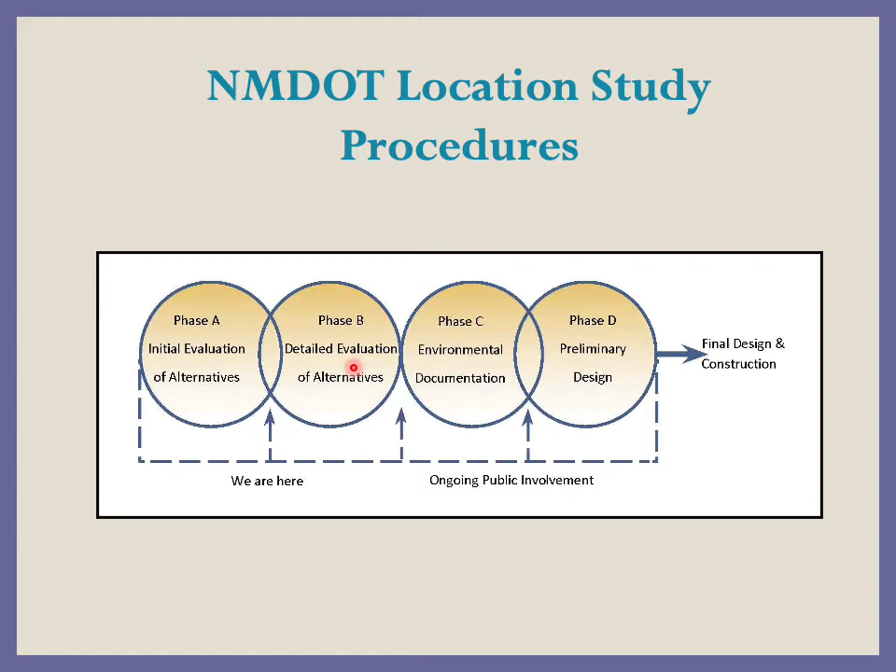The study process will follow the NMDOT location study procedures, which utilizes a phased approach to project development. We are currently in the study phase of the project. Tonight's presentation will primarily focus on analysis completed as part of the initial evaluation of alternatives and describe how that earlier work will be incorporated into the current Phase B study.

Transportation planning efforts for the St. Francis Drive corridor began more than 10 years ago with a 6-mile corridor study that began at Rabbit Road, south of Interstate 25, and ended at the New Mexico 599 interchange. The 2010 study identified improvements to the St. Francis-St. Michael's interchange as the #1 priority project for the corridor.

The NMDOT completed a Phase A technical study for the interchange in 2018. The technical study included an analysis of needed improvements, evaluated a range of potential improvement alternatives, and recommended which of the initial alternatives would be advanced for further study. The Phase B study will provide additional evaluation and analysis of the remaining alternatives and provide opportunities for public participation in the study process prior to selecting a preferred alternative for the project.

The project study area is shown in the figure to the right. Along St. Francis Drive, it begins at the intersection with Siringo Road on the south and ends at the West San Mateo Road intersection on the north. Along St. Michael's Drive, it begins at the South Pacheco Street intersection on the west and ends at the intersection with East Galisteo Street on the east. The project study area includes 5 signalized intersections and 1 non-signalized intersection.

St. Francis Drive, also known as US 84, is an important regional facility. It provides access from Interstate 25 on the south to a number of communities north of Santa Fe located within the north-central part of the state. Both St. Francis Drive and St. Michael's Drive are important arterial roadways within the Santa Fe local transportation network.

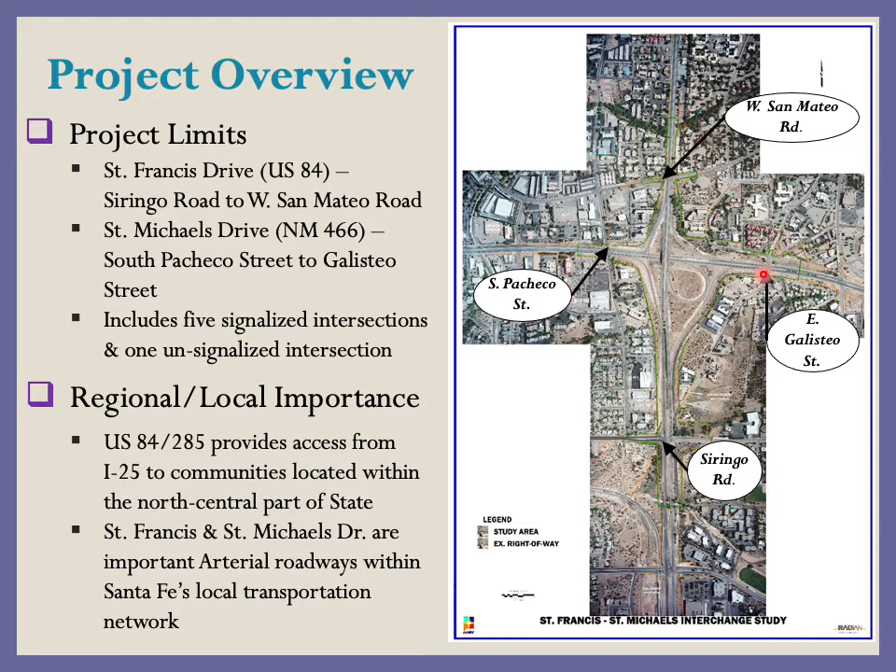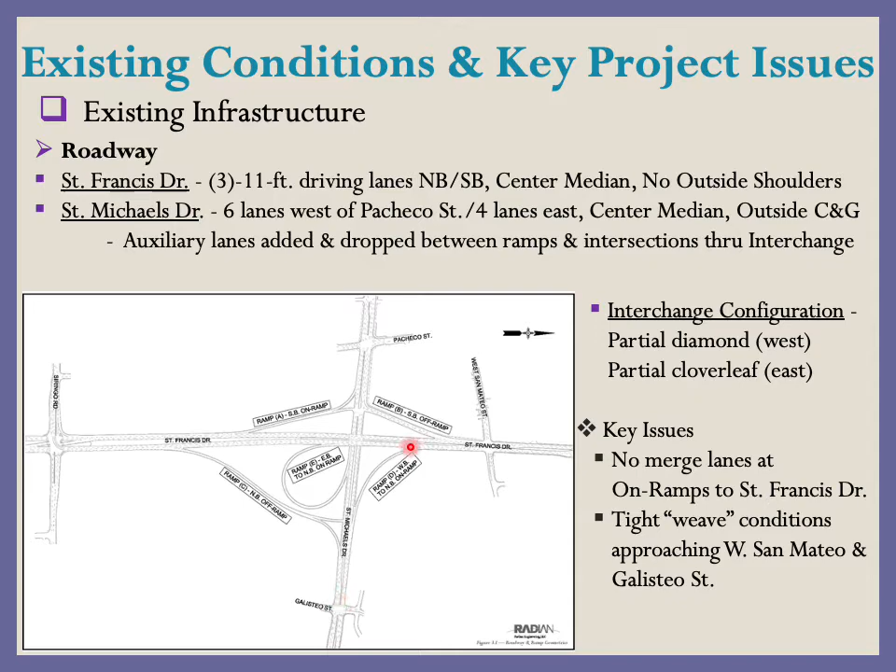Roadway features within the study area are as follows. Along St. Francis Drive, there are 3 11-foot lanes in each direction with no outside shoulders and a center median area. Along St. Michael's Drive, there currently exist 6 lanes west of Pacheco Street and 4 lanes east of Galisteo Street. Within the core of the interchange, auxiliary lanes are added and dropped between ramps and intersections. The interchange is currently configured as a partial diamond on the west and as a partial cloverleaf configuration on the east. Key issues include a lack of merge lanes at the 3 on-ramp locations to St. Francis Drive and tight weave conditions approaching the East Galisteo Street intersection and the West San Mateo Road intersection.

The existing interchange bridge carries St. Francis Drive over St. Michael's Drive. The bridge is 106 foot long by 92 foot wide with a 14-foot center median. The structure is comprised of a reinforced concrete box girder superstructure with full-height reinforced concrete abutments.

There are a number of key issues to be considered under the current study. The existing bridge is now approaching 50 years in age. The existing bridge deck is too narrow to accommodate a merge lane for the northbound on-ramp. A recent load rating analysis found the structure to be 43% under capacity. The bridge is classified as structurally deficient and functionally obsolete, and the structure type is not considered a good candidate for rehabilitation.

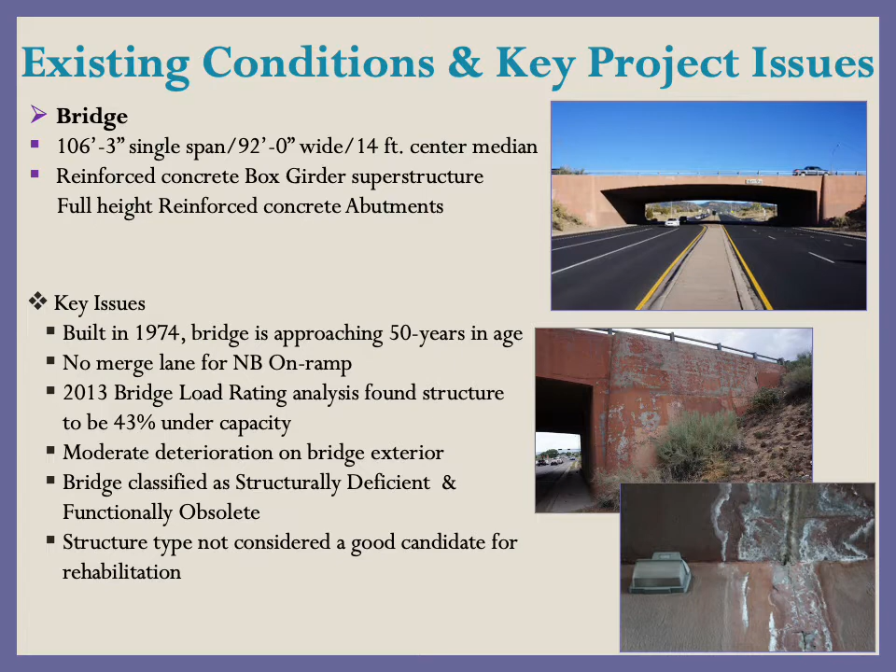Multimodal facilities. There are currently limited pedestrian and bicycle facilities within the study area. Pedestrian signals and crosswalks are found at some, but not all of the intersections. There is existing sidewalk along St. Francis Drive north of the project area and along St. Michael's Drive west of South Pacheco Street and east of Galisteo Street.

There's a multi-use trail that runs along the east side of St. Francis Drive from Siringo Road to Galisteo Street and connects south to the rail trail. On-street bicycle lanes can be found on St. Michael's Drive east of Galisteo Street and at the cross streets of Siringo Road and West San Mateo Road.

There are 4 transit operators currently operating within the study area. They include Santa Fe Trails bus service, the NMDOT shuttle service, the North Central Regional Transit District bus service, and the Rail Runner commuter train, which utilizes the Zia station south of the project area.

Key issues to be considered under the study include lack of pedestrian access along St. Francis and connectivity to the surrounding neighborhoods, missing sidewalks and unmarked pedestrian crossings along St. Michael's Drive, long crossing distances and lack of pedestrian refuge at intersections, and missing or inadequate bicycle facilities on St. Michael's Drive and at intersection cross streets.

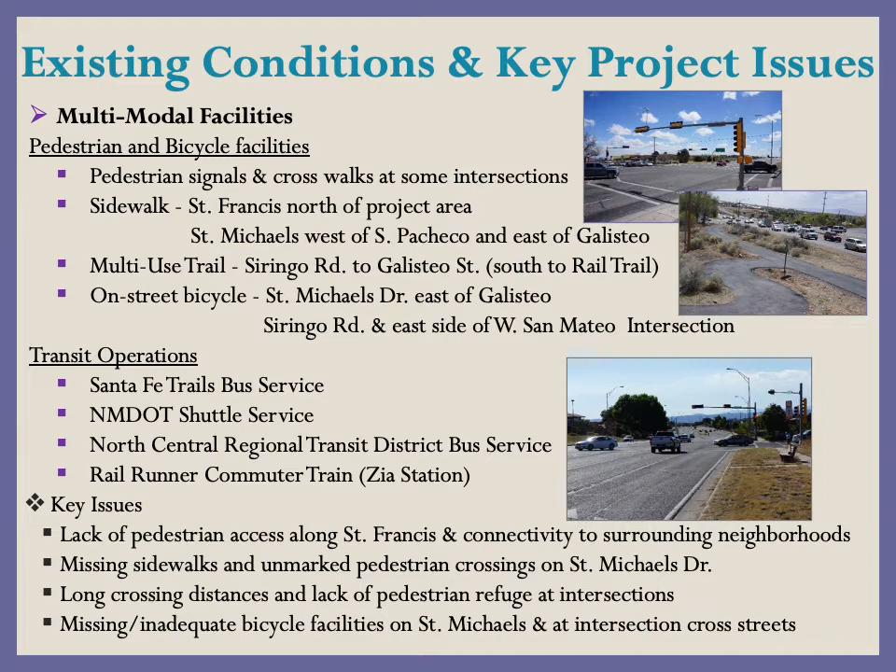Traffic operations. Both St. Francis Drive and St. Michael's Drive are heavily traveled roadways. Currently, almost 45,000 vehicles per day travel along St. Francis Drive, and just over 26,000 vehicles per day travel along St. Michael's Drive. Peak hour volumes within the 5 major intersections located within the study area are shown in the table.

Existing traffic counts show that peak hour volumes found during the PM peak are slightly higher than those found during the AM peak hour. Traffic operations analysis shows that intersections operate at an acceptable level of service overall during the AM peak hour, but turn lanes at the Siringo Road and West San Mateo Road intersections lack sufficient vehicle storage. During the PM peak hour, level of service is also acceptable, however, slightly higher delays occur versus the AM peak hour. The Siringo Road intersection operates at a level of service D during the PM peak, and insufficient turn lane storage is found at all intersections.

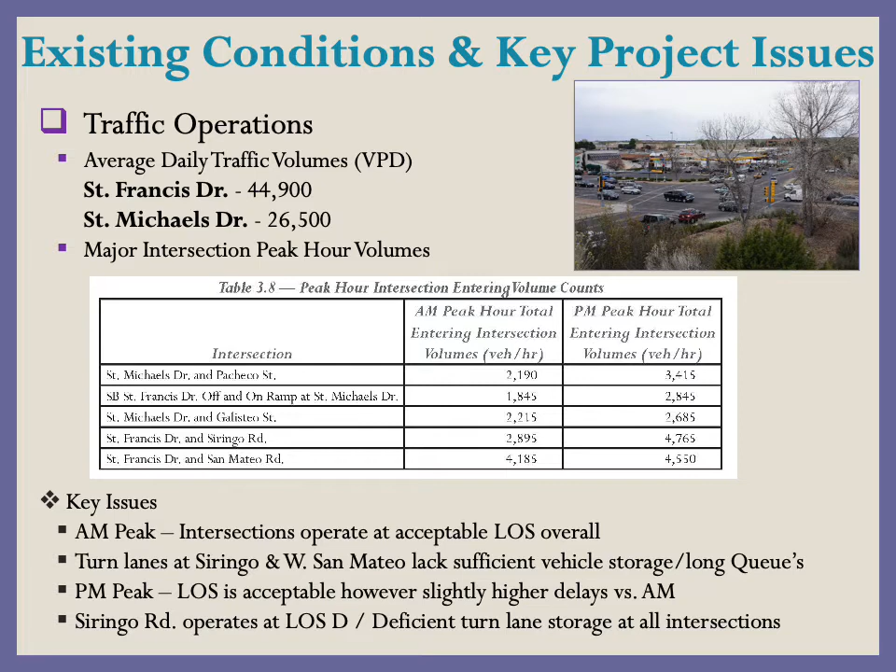Safety. The 3-year safety analysis was completed for the project. 222 total crashes were found to have occurred within the study area over the 3-year period. 82 of the crashes resulted in injury, and there were 3 pedestrian accidents, 1 resulting in a fatality. The study also identified several hotspot locations where clusters of accidents were found to have occurred within the study area.

The hotspot locations were as follows: 2 of the on-ramp merge locations from St. Michael's Drive onto St. Francis Drive, the southbound ramp intersection on St. Michael's Drive, the eastbound approach to Galisteo Street intersection along St. Michael's Drive, and all 4 of the outlying signalized intersections. The number and type of crashes found to have occurred at St. Francis Drive at the on-ramps were found to be directly attributable to the lack of available merge area.

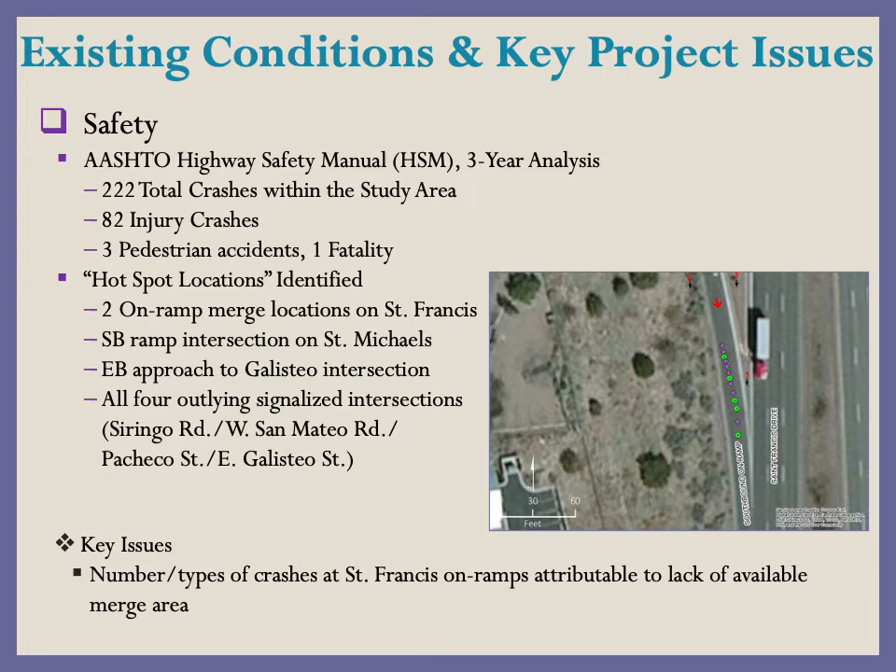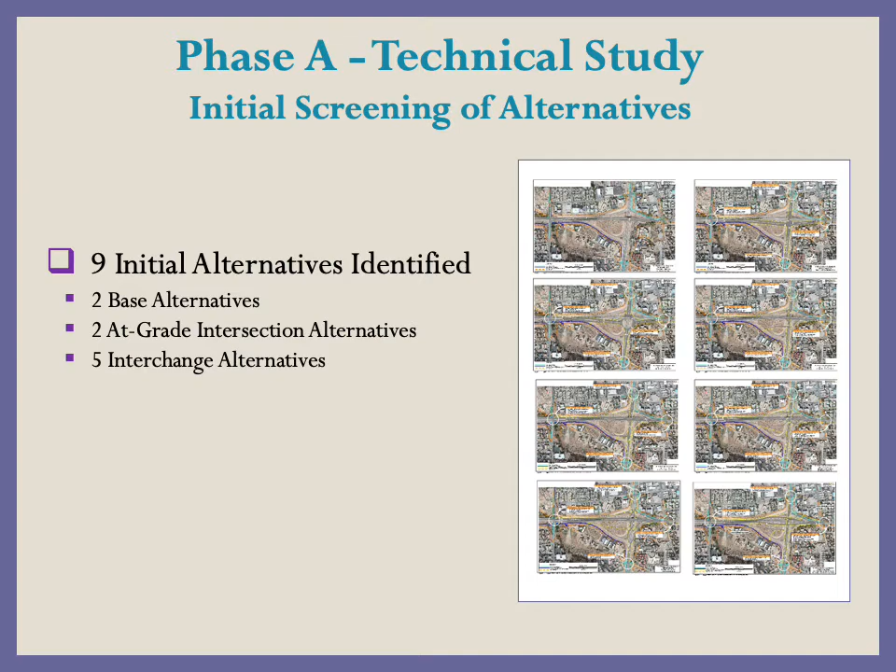We will now review the initial alternatives that were evaluated under the Phase A technical study. 9 initial alternatives were identified. The alternatives can be grouped into 3 basic categories: 2 base alternatives, 2 at-grade intersection alternatives, and 5 interchange alternatives. 2 base alternatives were considered under the technical study. The no-build alternative would include no improvements to the existing interchange and is maintained as a basis for comparison of the other study alternatives.

Prior to 2005, St. Francis Drive existed as a 4-lane roadway within the study area. It was then restriped to add an additional lane in either direction, which eliminated the outside shoulder areas and the merge areas at the 3 on-ramp locations. Under the restriped existing St. Francis Drive alternative, the roadway would be returned to a 4-lane section, which would reestablish the merge areas at the on-ramps.

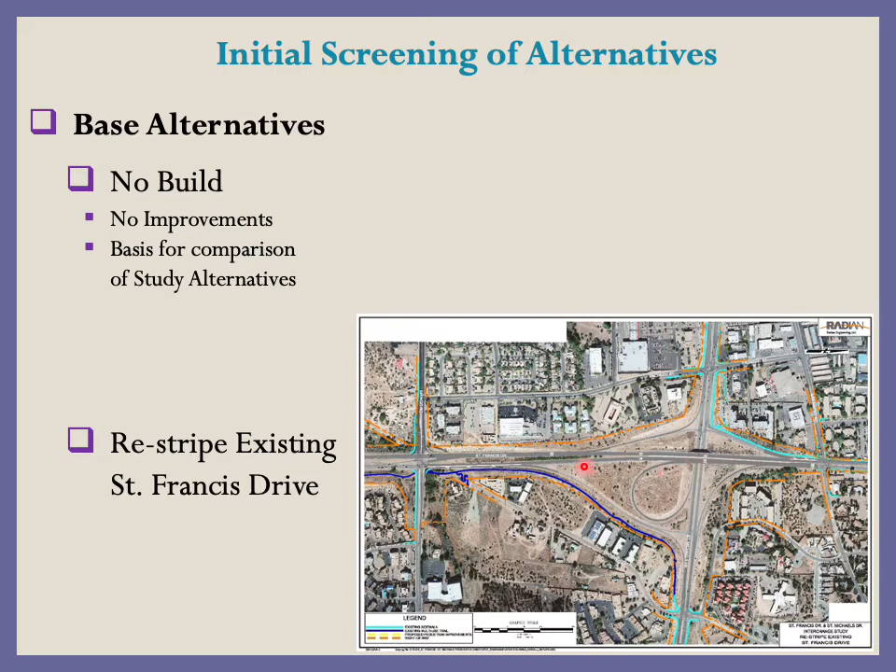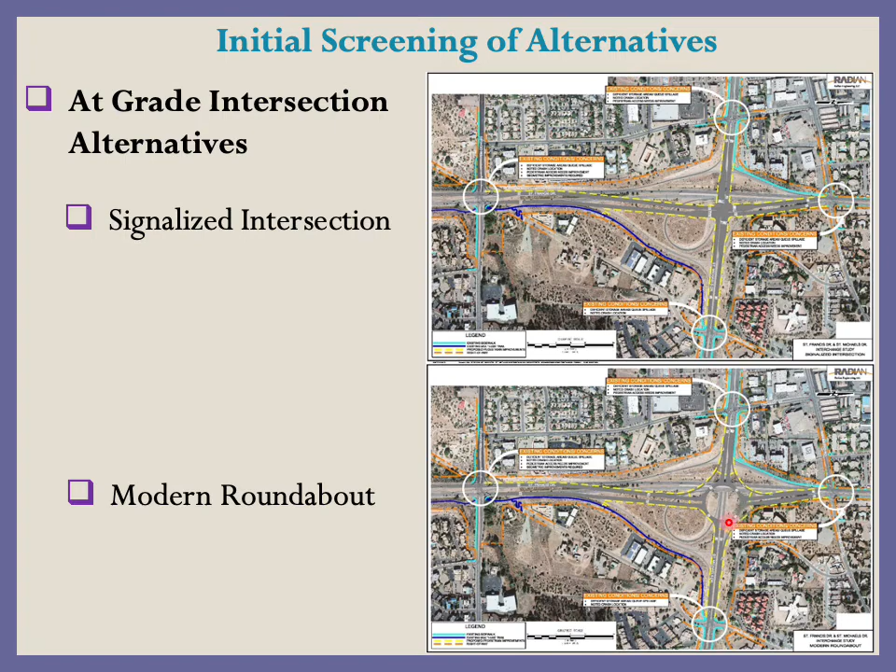There were also 2 at-grade intersection alternatives evaluated under the study. Under the signalized intersection alternative, the existing bridge over St. Michael's Drive and all ramps within the interchange area would be removed and replaced with a single signalized at-grade intersection of St. Francis Drive and St. Michael's Drive. Under this alternative, improvements would also be made to the 4 outlying intersections. Under the modern roundabout alternative, the same improvements would be made, but rather than constructing an at-grade signalized intersection, a modern roundabout would be constructed.

There were 5 interchange alternatives evaluated under the study. Under the diamond interchange alternative, the existing alignment along St. Francis Drive would be maintained and a new bridge built over St. Michael's Drive. The ramps on the west side of the interchange would be improved at their current location, while the ramps on the east side of the interchange would be removed and replaced with new ramps to form the diamond configuration. New auxiliary lanes would be built along southbound and northbound St. Francis Drive to accommodate the new on-ramps. All 4 of the outlying intersections would be improved under each of the interchange alternatives.

Under the ramp reconfiguration alternative, the existing on-ramps on the east side of the interchange would be removed and replaced with a single on-ramp from St. Michael's Drive. The existing off-ramp and ramps on the west side of the interchange would be improved at or near their current locations. New auxiliary lanes would be constructed along southbound and northbound St. Francis Drive to accommodate the new on-ramps. This alternative would require a new and widened bridge over St. Michael's Drive.

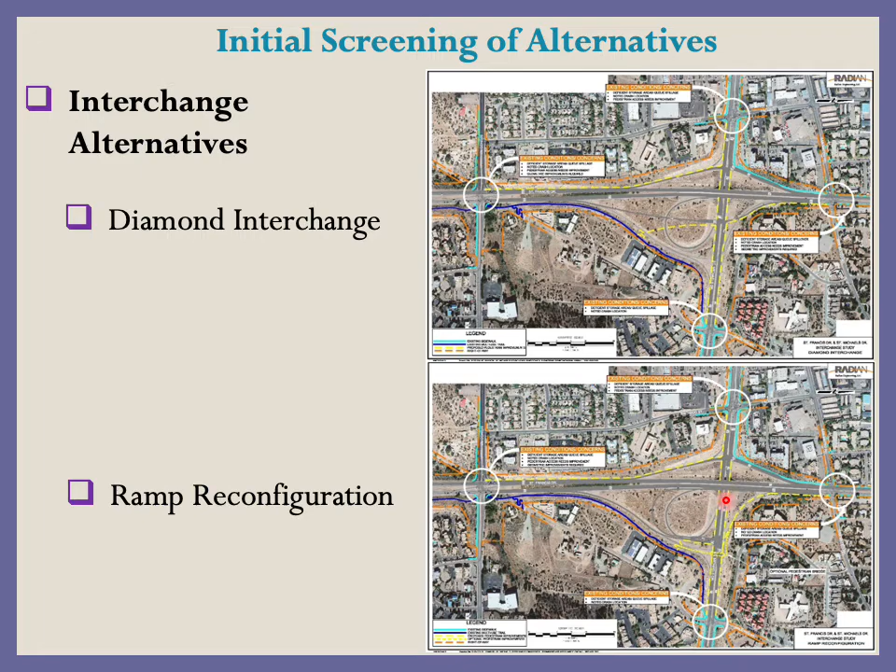Under the single-point urban interchange alternative, the entire interchange would be removed and reconstructed into a new configuration. The existing alignment of St. Francis Drive would be maintained and a new bridge over St. Michael's Drive would be constructed. The on-ramps would be reconfigured to form a single at-grade intersection on St. Michael's Drive underneath the new bridge. Auxiliary lanes would be built along southbound and northbound St. Francis Drive to accommodate the new on-ramp locations.

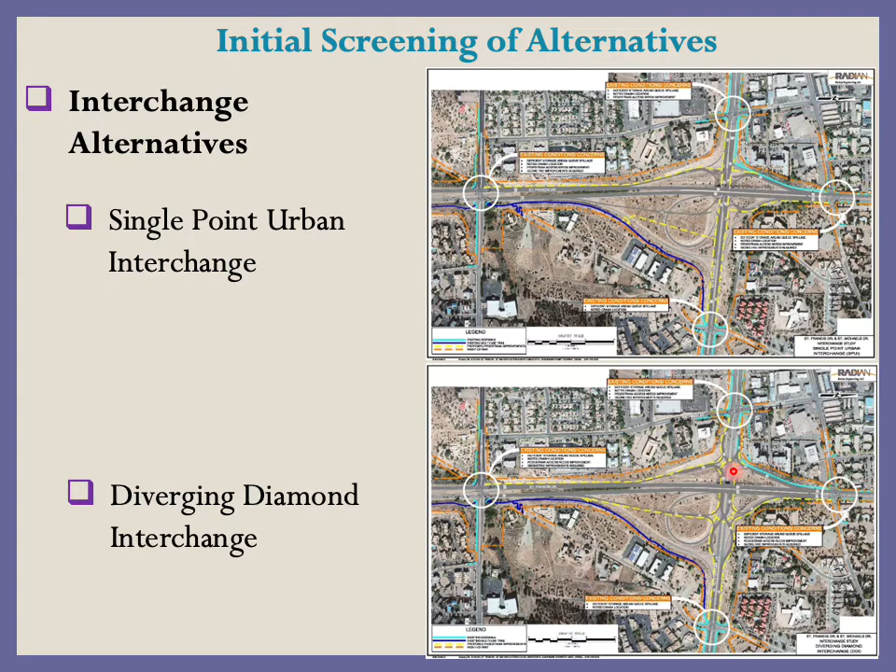Under the diverging diamond interchange alternative, similar improvements would be made along St. Francis Drive with a new bridge built over St. Michael's Drive. Auxiliary lanes would also be constructed in the southbound and northbound directions to accommodate the new ramp configuration. Along St. Michael's Drive, significant improvements would be made, with intersections being built to accommodate the new divergent diamond configuration, which eliminates left-hand turn movements at the intersections.

The final interchange alternative is the split bridge left-on access alternative. Under this alternative, a portion of St. Francis Drive and the existing bridge over St. Michael's Drive would be removed and replaced with new northbound and southbound alignments along St. Francis Drive, including 2 new twin bridges to be built over St. Michael's Drive.

Under this alternative, the existing on-ramps on the west side and east side of the interchange would be removed. Drivers wishing to access St. Francis Drive would do so from a new intersection which would be built between the 2 new bridges and new on-ramps being built along the old roadway alignment. This would require vehicles entering onto St. Francis Drive to merge into the inside lanes from the left-hand side.

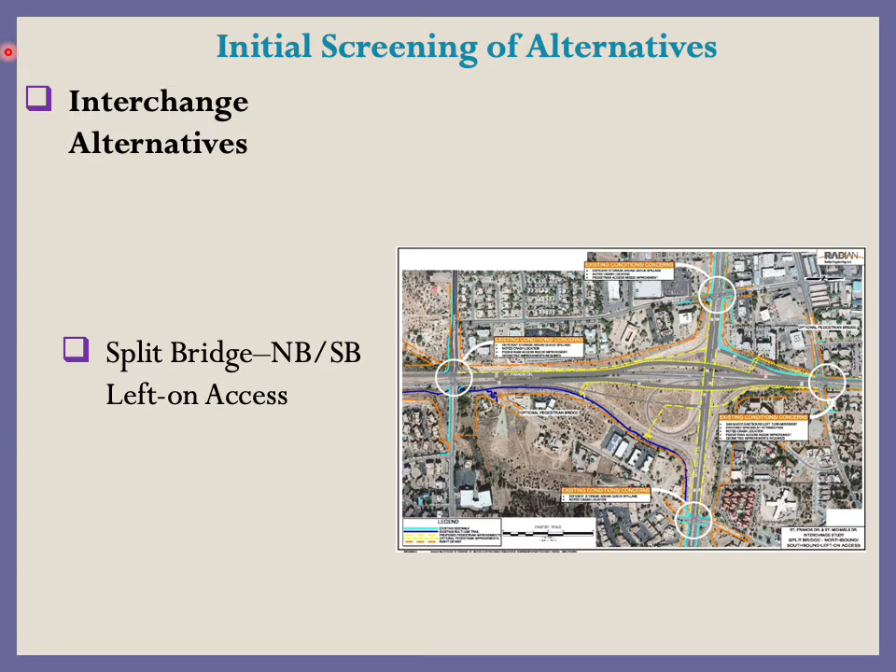The initial screening analysis determined which of the alternatives would best meet the needs of the project. As a result, the following alternatives have been recommended for further evaluation under the Phase B study. Although the no-build alternative would not meet the needs of the project, it remains under consideration as a basis for comparison of the build alternatives. The signalized intersection alternative would address the project needs and provides an at-grade alternative for comparison against the interchange alternatives. It would, however, require a large multi-lane intersection and is anticipated to have operational and safety disadvantages.

The diamond interchange and ramp reconfiguration alternatives both address the project needs and would have a greater range of potential benefits. They both, however, would have higher traffic impacts during construction and a higher construction cost. The split bridge left-on access alternative also addresses the project needs and would have a greater range of potential benefits. Because of its unique configuration, it would have less traffic impacts during the construction phase, but would require an unconventional left-on access and also would have a high project cost.